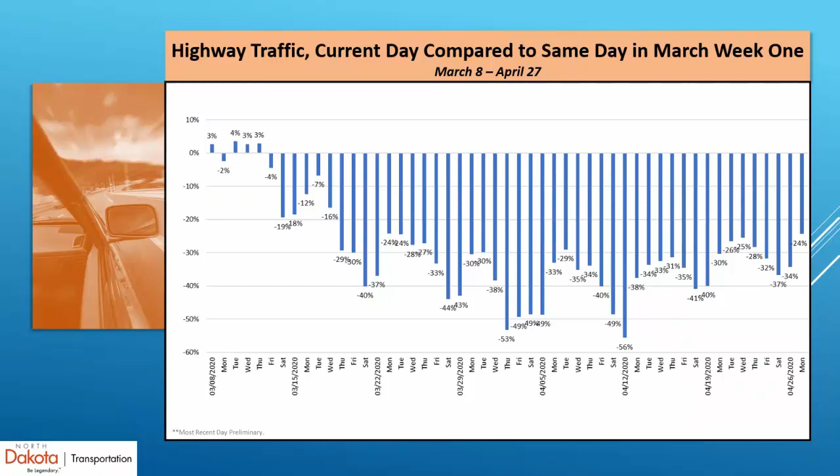We are talking about some gap funding coming from the federal government to assist DOTs around the country, including the North Dakota DOT, in dealing with the gap that's created from this kind of traffic volume reduction. So we thought it was an interesting chart, thought we'd share it with you and talk about its implications to the agency. It's very interesting.

I wanted to provide a bit of a safety message around COVID to the audience today, to our DOT employees, to our partners that are out there in the consulting community and contracting community, and also give you a message that we are going to continue with all of our projects scheduled for letting in 2020. We have, as I said earlier, quick started many of our projects. I'll talk about those in a bit.

And we wanted to share with you things to consider when you are working on DOT projects and with the NDDOT, and some of the similar things that we have considered here.

And as I had said earlier, our teams are mastering now ways to eliminate face-to-face meetings. So one of the things our teams are looking at with our projects are trying to do some of the project meetings online as opposed to face-to-face. Again, like the NDDOT, regular cleaning of common work areas and vehicles and field labs. Those are very important things to do to reduce the spread of the COVID virus.

And we have found that it's been very, not only helpful for mitigating the spread of the virus, but also I think people feeling good about the fact that they have to get in a vehicle that's been cleaned, that they know it's clean, or that they have to work in an area that they know it's been cleaned. I mean, that just gives a sense of confidence and helps them to engage in a normalized way. So it's really very helpful.

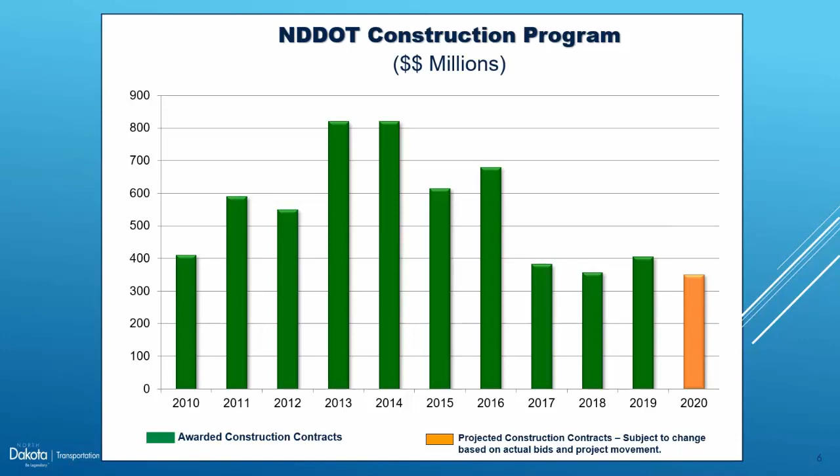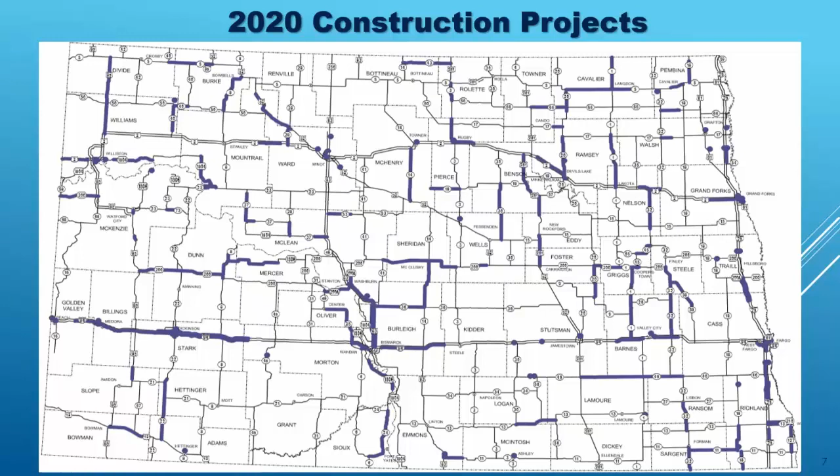And so this gives you a sense of all of the projects that we are going to be doing in 2020 throughout the state. And it's a really good representation geographically, really good representation from a safety point of view, from an asset preservation point of view. We're really quite pleased with all of the work that you all are doing for us, and our teams have been planning for a number of years. So I want to thank all of them for all the hard work that got us to this point in 2020.

I wanted to highlight a couple of projects. One is the completion of the Fargo Main Avenue project. We had started this last year, and it was a remarkably good project. So I thought it went great last year, and really remarkable sort of effort. And the second phase of that is happening now. I think they actually started this week.

The last segment of Highway 1804 near Williston is going on, and that is, let me see, I got a little note here. That is from the Red Mike area to County Road 42. And so we're really pleased that that's going on. And then, of course, the Long X Bridge replacement is happening now. I think we were delivering steel in the winter, and that's on Highway 85 south of Watford City.

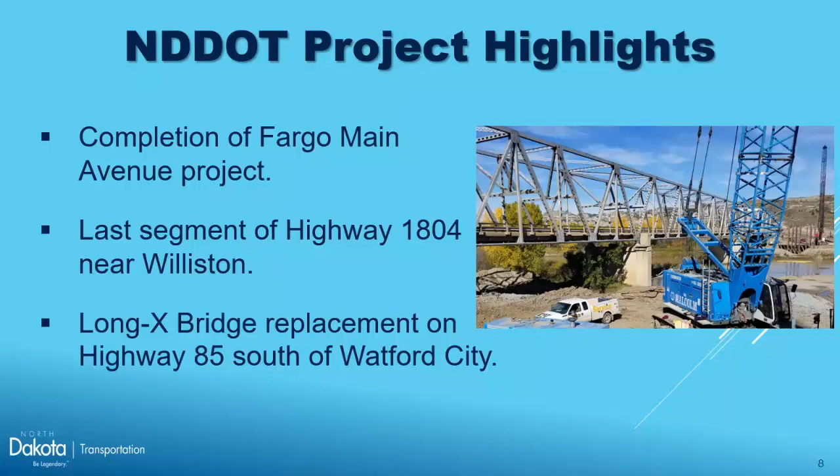I've also asked the staff to begin the 4-laning between Watford City and the Long X Bridge, and that's going to be coming up here in the next couple of years. Well, it's being worked on now. All the pre-construction work is being done now, and we'll see that as well.

But there's a number of projects here, something like, as I said, 160 to $200 million projects that we pushed up to begin now instead of a month or two from now. So active construction season in 2020, amazing effort last year as well.

And I think they were going to run a video. I'm going to look at, no, not yet. It's not going to run. Oh, it's not going to run? Okay. The link is on the live show. Okay. So there, I'm sorry, I've got somebody helping me.

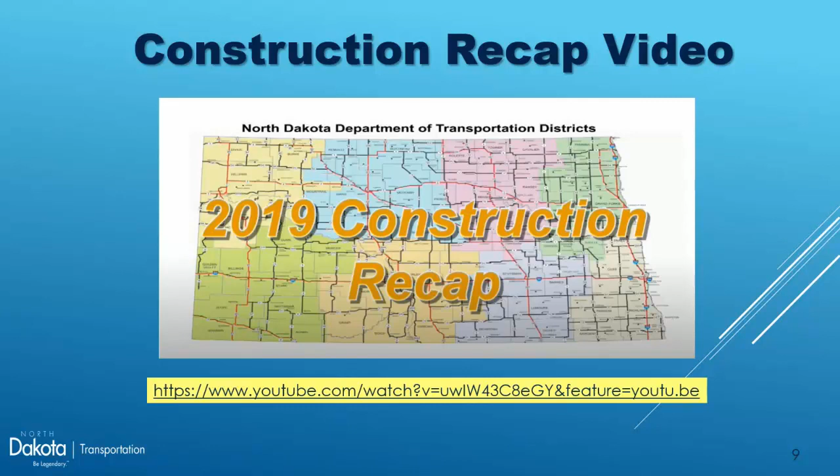We could take any questions now, but before we did that, I just wanted to express again my sincere gratitude to all of you for being here today, for being a part of the PDC conference. This unique format, I think, is something that we are learning as we go, and I think that it's something that we're going to be doing in the future. And we'd love to get your feedback about how to do this kind of presentation better, and how to do it in an optimal way as we go forward.

So we, as an organization that is deeply immersed in innovation, as an organization that is built around engineering and science, this kind of format is really interesting to us. And so we want to have you participate with us by helping us in terms of moving this kind of presentation format forward. But I also want to extend my gratitude just to you for all that you have done, not only in 19, but all that you are doing in 20.

And for our employees and our partner consultants, our partner engineering organizations, construction companies that are out there, and suppliers, thank you so much for what you do for North Dakota. And again, on behalf of Governor Burgum and Lieutenant Governor Sanford, the state legislature, thank you so much. We could not have the kind of great state that we have without a strong transportation system and a strong network of partners to be able to help us deliver that. So thank you so much.

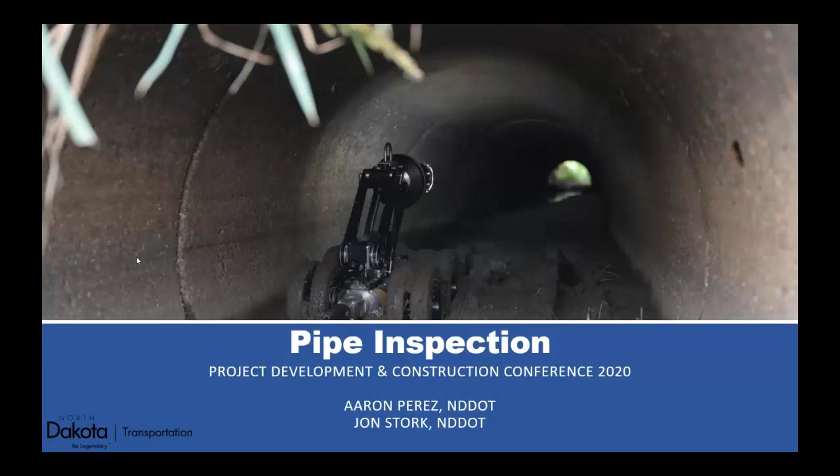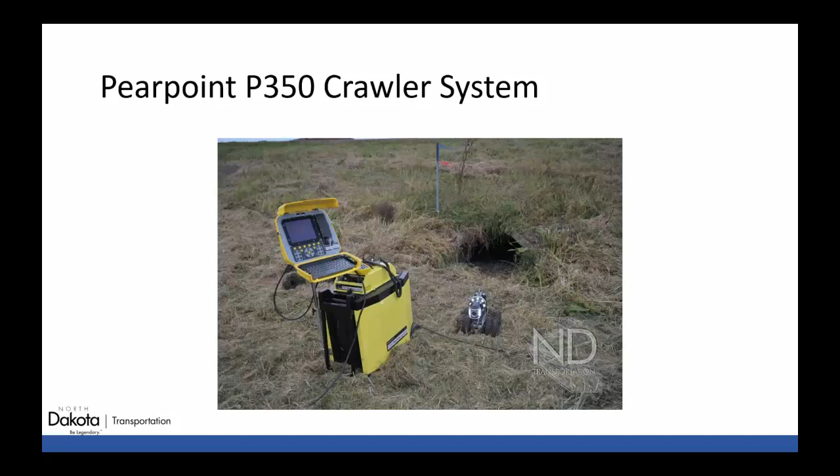Our first piece of equipment is the Pearpoint P350 crawler. This system is made up of the crawler itself, a powered drum, and a control module. To go over some of the crawler's capabilities, this system is completely waterproof. It is submersible up to 300 feet. The camera is pan, tilt, and zoom capable, and it runs off of electricity. We've primarily used a generator for collection, but there are other options with this.

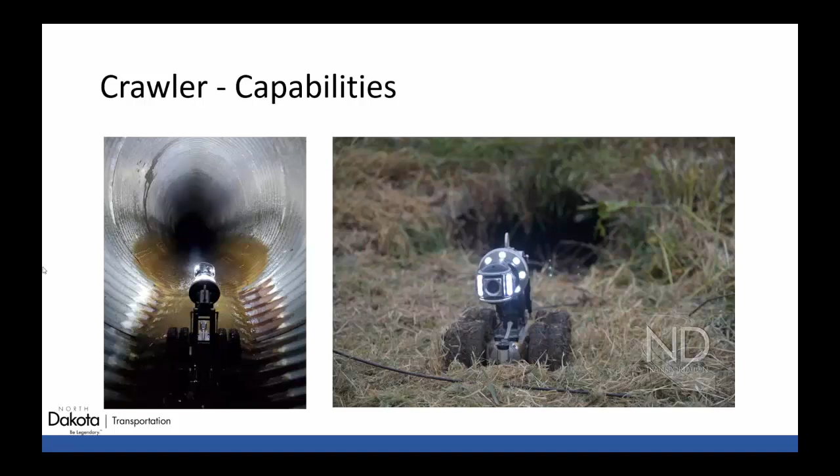Here are two pictures of the movement from the optional elevating arm. This arm allows the camera to be able to center itself in pipes up to 60 inches, depending on the overall configuration. And as you can see from these pictures, we are using double wide tire configurations for a total of 8 tires.

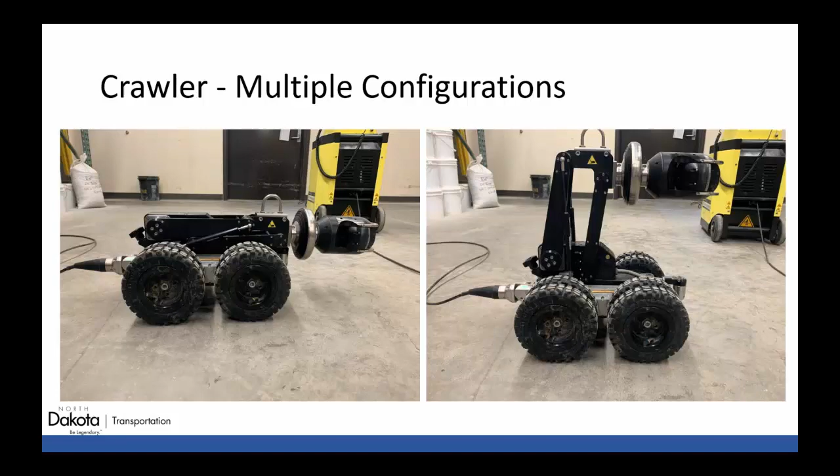And this crawler system really comes with multiple options for tires that can be used on a situational basis for our needs. This system also has a 4-tire cradle, which you can see on the picture in the middle and on the right, which gives the crawler the most height and uses the biggest tires that we have.

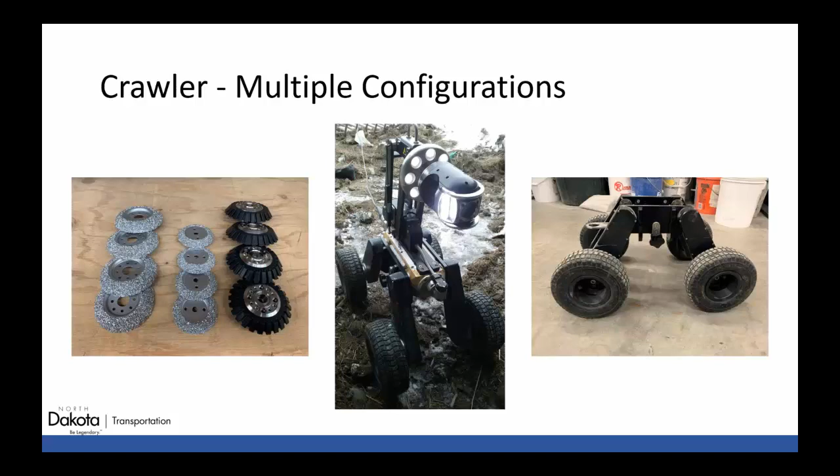So to talk about the command module and the powered drum, this crawler is really run by the command module. The powered drum has a total of 1,000 feet of cable in it, and all information travels through this cable from the camera to the command module. So it's really an all-wired system.

And the command module is where you control the crawler using the onboard screen to see what the camera sees, and there are also multiple ways to control the camera through this module. As you can see in the picture on the left, John is using the optional pendant to actually control the crawler while looking at the command module to see what the camera sees.

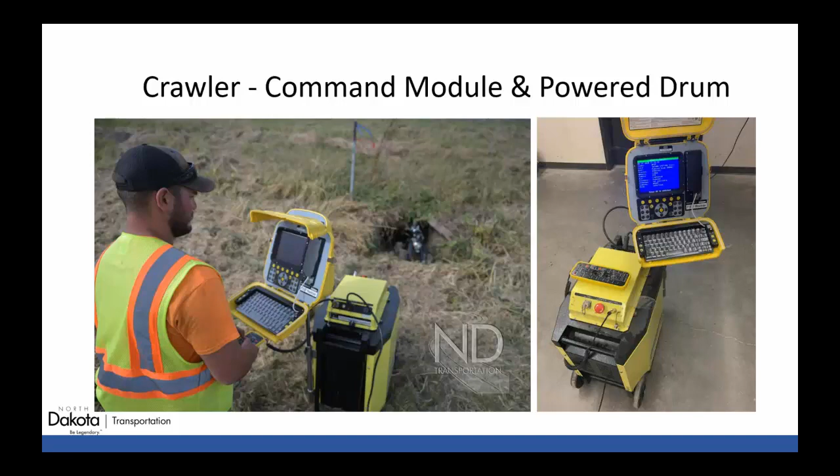So this is what you would see if you were controlling the crawler. Here's some of the on-screen details. So on the top is the distance counter, and this is actually done by measuring the length of cable that is out of the powered drum. So distance isn't measured by wheel movement, which is very helpful when the tires spin in mud and slick areas to keep that distance actually accurate.

Underneath that's the pitch angle, and the camera has a built-in inclinometer, which is used to display this pitch angle. And PurePoint calls the display towards the bottom of the screen the mimic controls, and here's where you can see the relative location of where the camera is, the horizontal orientation of the crawler, and your speed and steering thresholds, whether it's forward, backwards, left, or right.

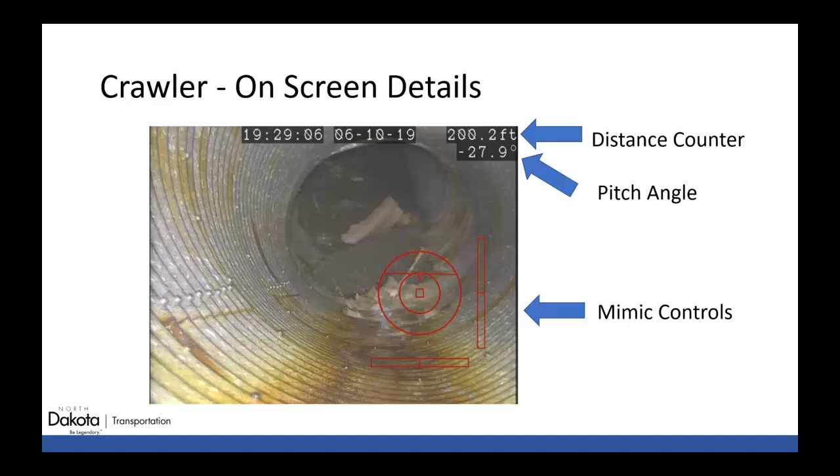So our second piece of inspection equipment that we have is our Hydraulic Inspection Vehicle Explorer, or HIVE for short. This is our more speedy option and more user-friendly option as well, and consists of a GoPro mounted to an RC car that can all be controlled using an iPad and a controller.

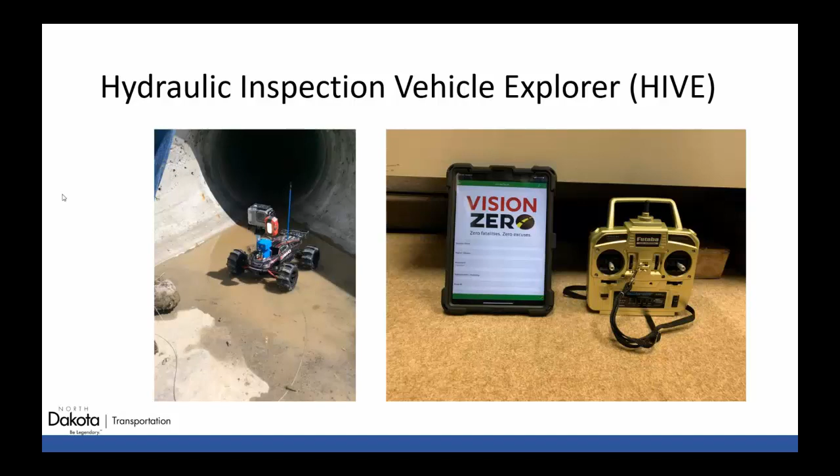We first found out about the HIVE unit from MnDOT. On their website, they have building instructions, parts lists, wiring schematics, anything you can need to assist in putting together the units, along with general information and research that's been done on it. Also, North Dakota LTAP has put together a HIVE, actually before we did. Dale Hageland with ND LTAP let us actually borrow their unit to assist us in putting together our first HIVE.

And Dale also gave us all their own parts lists, kept all their receipts and boxes to all the individual pieces, and this helped us out tremendously. So thank you, Dale. LTAP also has information on their website, including a user manual for their HIVE, if anyone is looking for additional resources.

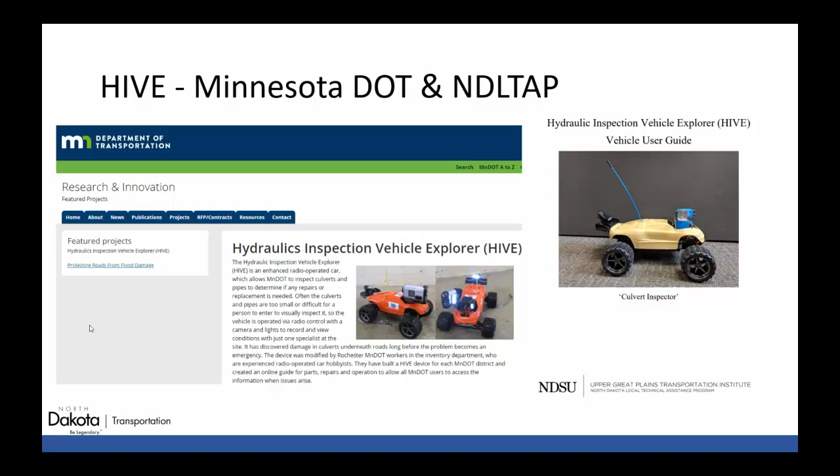We were invited by Mark Schrader with FHWA and Dale Hageland with ND LTAP to come and see how inspections were being conducted on pipes near Max, North Dakota in 2019 that were of importance to FHWA. And this was the first time we really got to see the HIVE in action. We actually used LTAP's HIVE for this inspection, and FHWA was using the Esri Collector app for their documentation and condition and location mapping for the pipes under these roads.

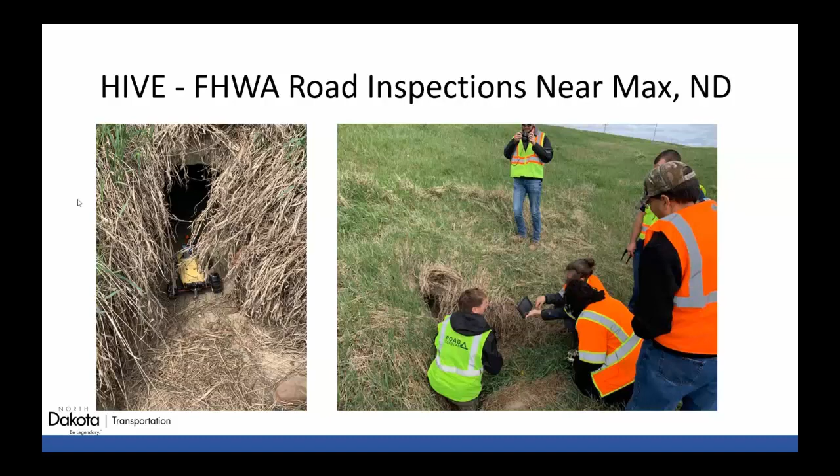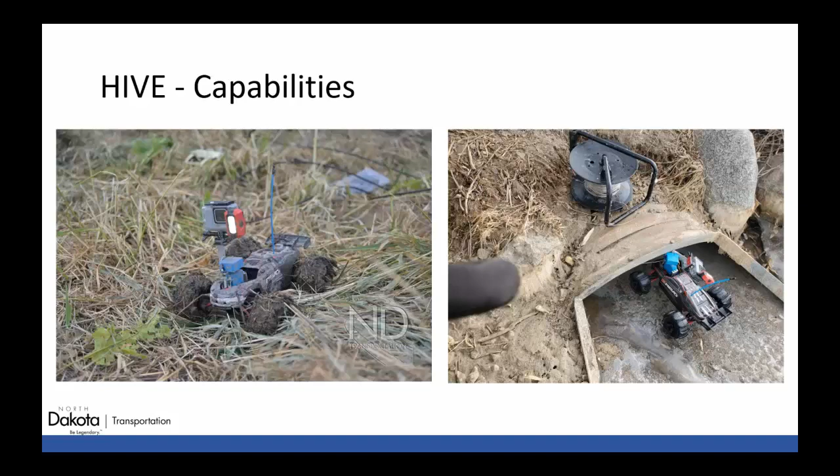So let's go over some of the capabilities of the HIVE. We found out this thing is very capable. We've had great success with this unit being able to run in actual really harsh pipe conditions. This thing's waterproof to about 4 inches of water, and we really consider this thing a little monster when it comes to these inspections. It's a pretty cool piece of equipment.

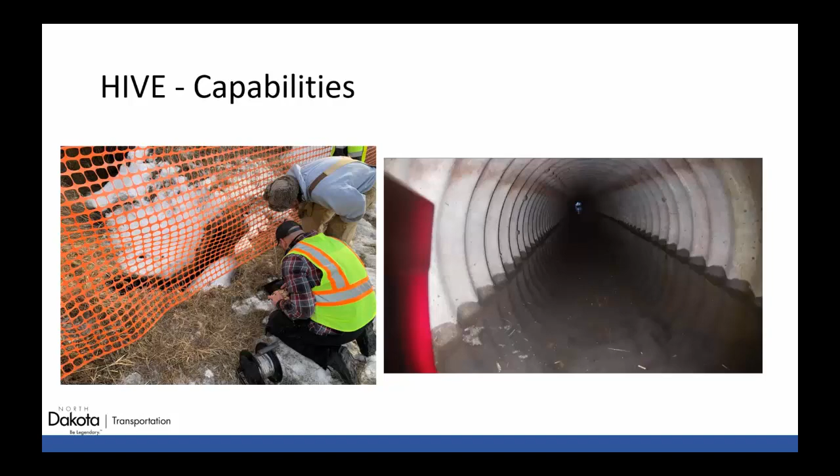So now I'll get into some of the different inspections we have done that are more focused on the crawler. The first is a pipe along the west ditch of I-29 northbound through Grand Forks on exit 141, and it's right next to a railroad bridge. This pipe is about 140 feet long and ran parallel with the interstate. This pipe was disturbed due to a landslide, and we were asked to go inspect it by our NDDOT geotechnical section.

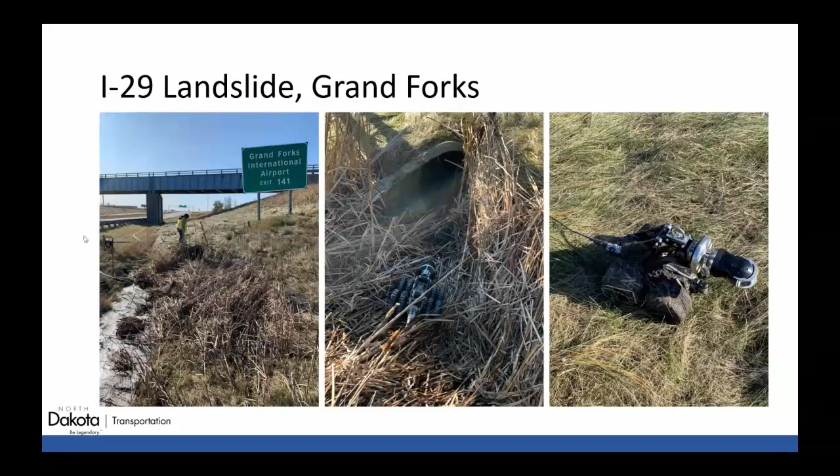So as you can see, this landslide really messed up the alignment of this pipe. The embankment near the railroad bridge crossing displaced the end section by about 2 feet. And we actually had some serious issues with our equipment traversing this pipe due to the severe separation between the barrels, as you can see.

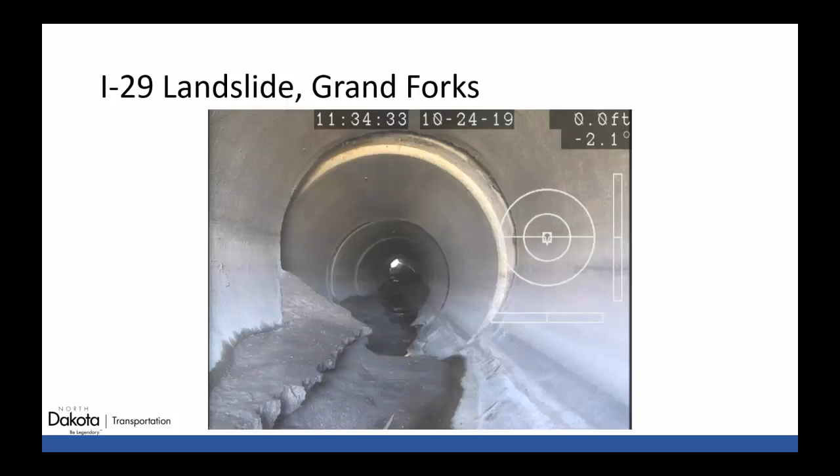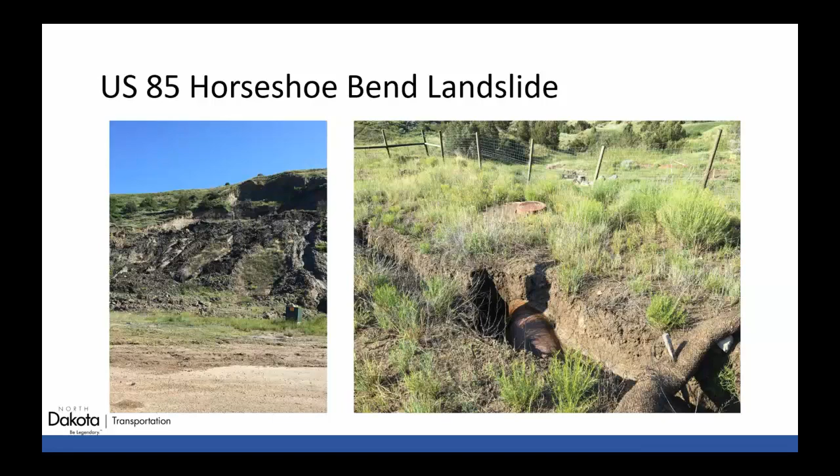So we deployed from the inlets of each pipe and really tried to find the best way to set up and maneuver through the landslide material that was very slippery Badlands clay, as you can see from some of the material in these pictures around the pipe inlets and where we set up.

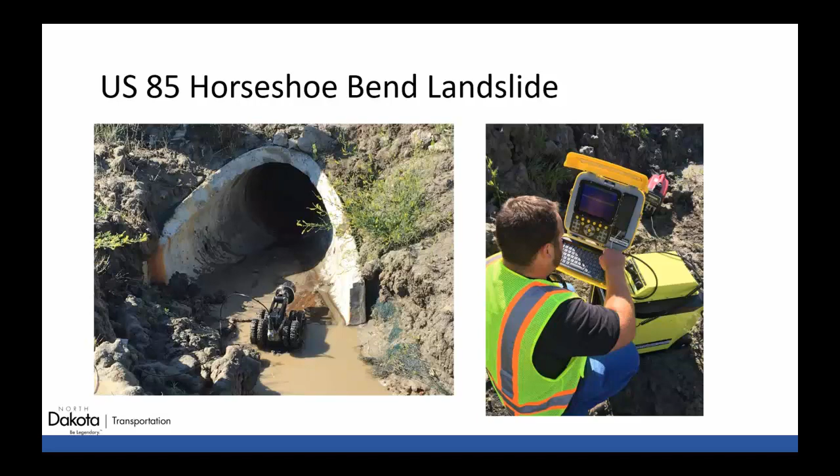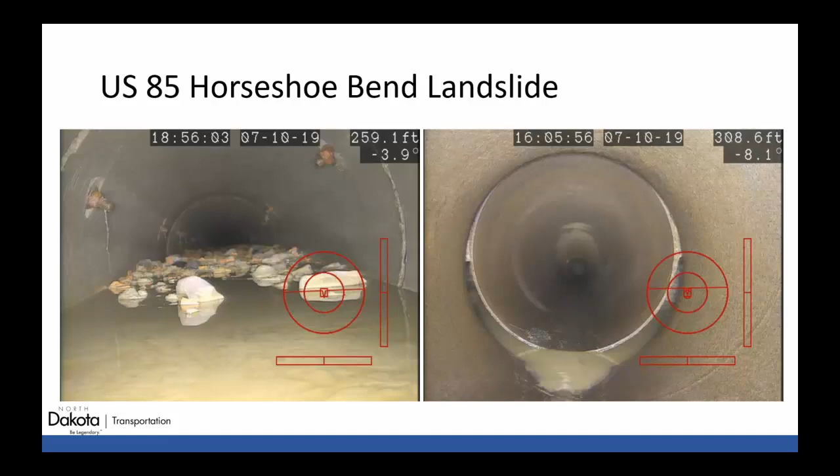So our next inspection happened in Bismarck near Grant Marsh Bridge. The inlet of this pipe was located in the south ditch of I-94. It traveled downhill a 2-to-1 slope to River Road, where it then flattened out under River Road and exited directly into the Missouri River. We were asked by Bismarck District to inspect this, as they knew there was already an issue in this pipe, as the ground close to River Road had started to wash away around the pipe. So they just wanted to see how bad the issue was and how much of the pipe actually needed to be replaced or fixed.

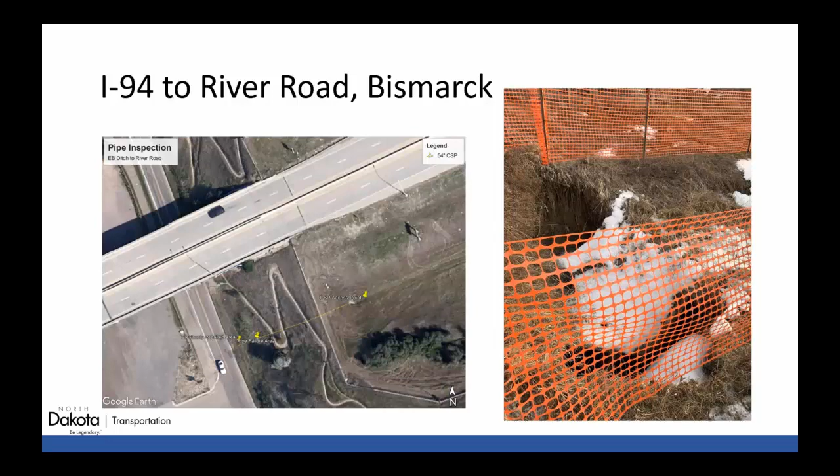So we deployed in the south ditch of I-94 in the inlet of the pipe. The outlet at the time was pretty well submerged by water and also partially frozen, which restricted us. And the district came out and removed the large inlet grate in order for us to actually conduct our inspection.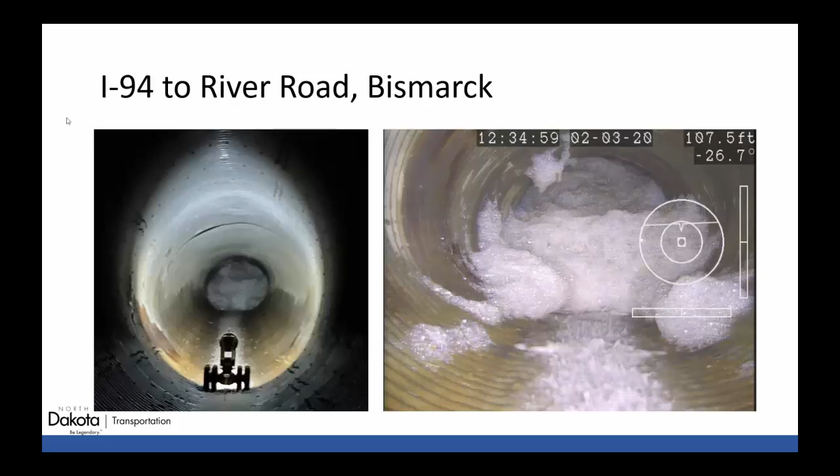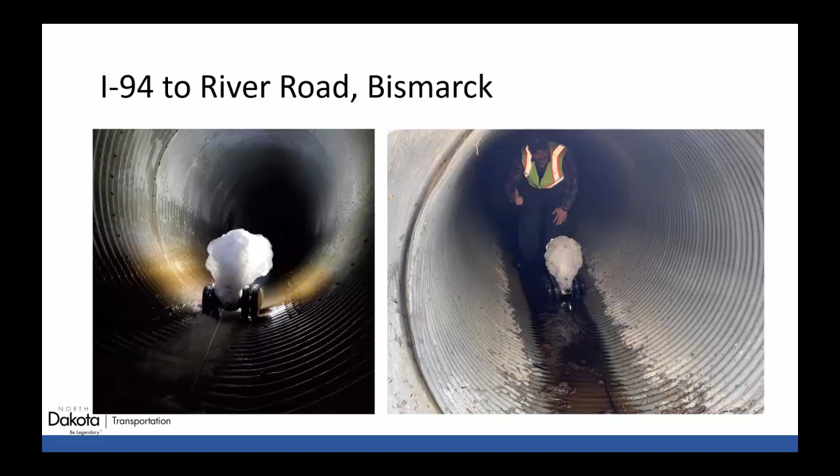We put our crawler through the foam to see if we could see anything and maybe see if it ended. Instead, we found out it did not end and completely engulfed our crawler, including the camera, and didn't allow our camera to see anything. And we pulled the crawler out. This is how it looked, just like a little cloud on wheels.

So we waited a few days and went back out to inspect this pipe once the foam had subsided. And as you can see from the picture, the water traveling down this 2-to-1 right before the pipe flattened out was actually exiting through a hole in the invert of this pipe, flowing around the pipe, causing the washout issue that the district saw. And here I will show a short video of what this actually looked like from the crawler.

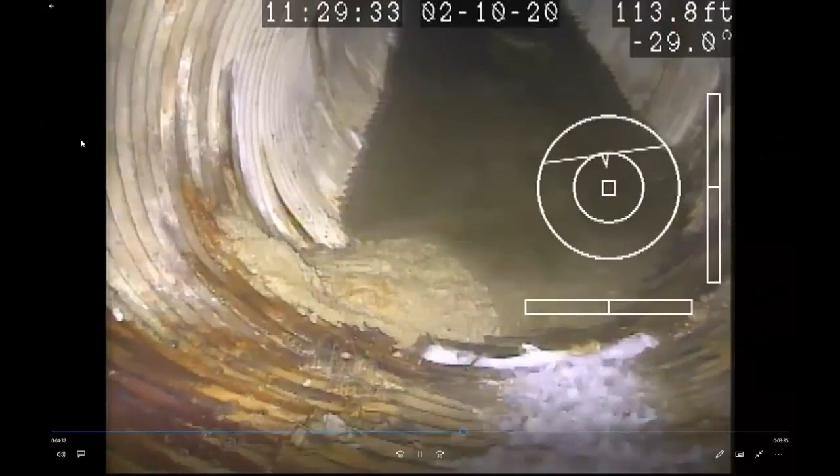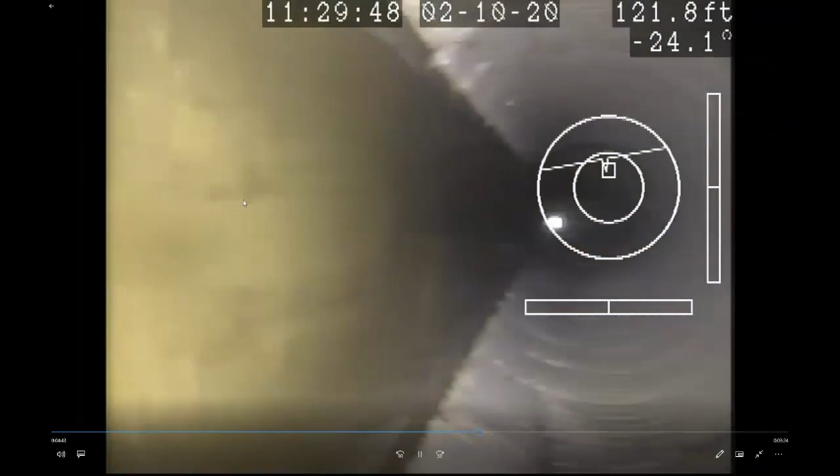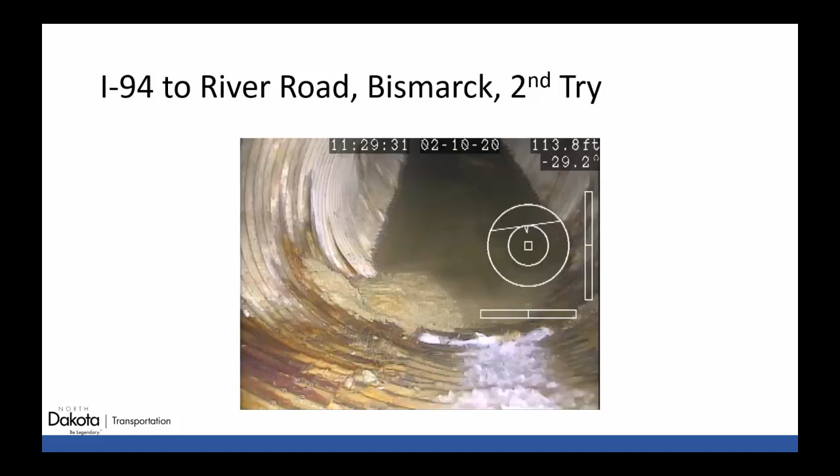So now I'll turn it over to John and let him go over the Hive unit more in depth, as well as the collection software and where all these inspections and inventorying will lead to.

So a little bit more background on these inspections. The inspections that Aaron was talking about are more of an emergency pipe inspection where typically your failure has already occurred, whether it was from a natural event such as a landslide or a storm event, or just a failure from age or deterioration. And then our goal is to assess the extent of the damage and basically provide an in-depth look and aid the designers in figuring out the best course of repair in these situations.

So these are typically the most extreme environments we encounter. We usually bring both units, and sometimes we deploy the more robust pier point if the situation calls for it. Sometimes, like Aaron said, we use the smaller unit depending on the situation.

So on the other hand, these corridor assessments are typically more of an asset management type routine inspection. These are meant to assess the in-place pipes for replacement on upcoming projects, or simply establish a baseline rating to use for deterioration monitoring and planning purposes for the future. So these assessments, typically we've been doing 10 to 20 mile stretches, and what we found so far, most of them are functional pipes in fair condition.

So these assessments are a great tool for finding pipes that we need to replace, but not only that, they're great for finding which pipes we don't need to replace. So to do these assessments, we asked for some district input on upcoming projects or problem stretches of roadway where we could test our equipment and involve district personnel for training opportunities.

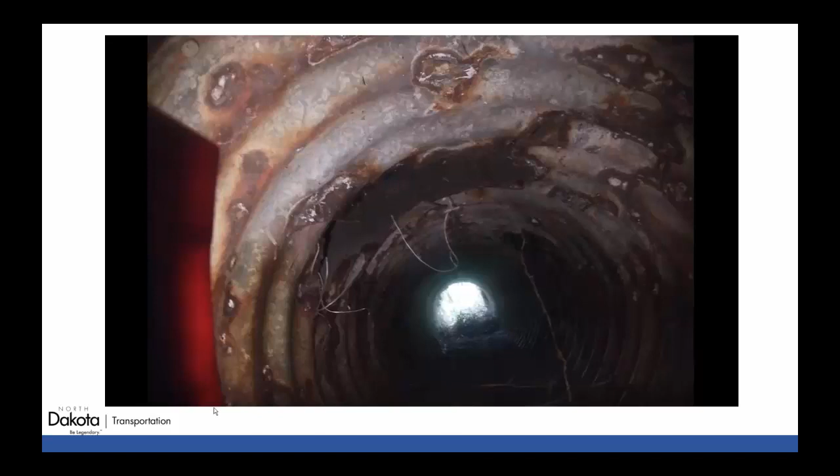This is a good example of a construction installation problem. This is probably from unloading the pipe or from actually installing the pipe. You can see a tear.

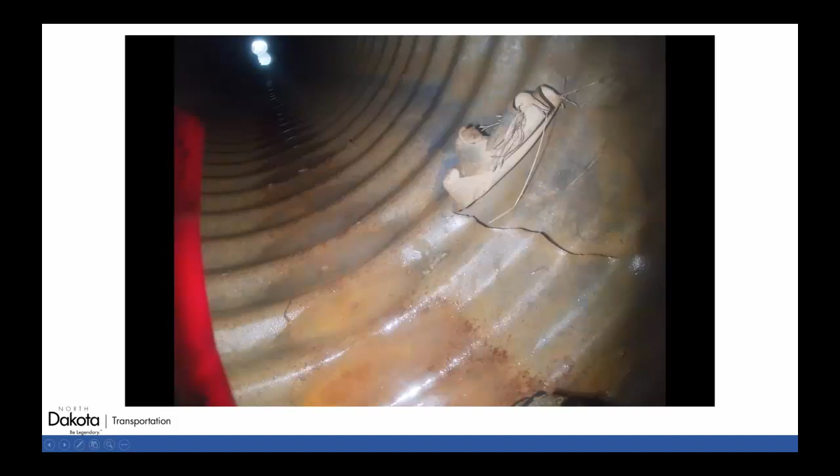Another neat thing to note was actually a few weeks after we did our initial training with Dickinson District, they actually utilized the Hive on a full depth reclamation job up near Halliday, North Dakota on Highway 8. So this was encouraging to us just to see the adoption of the new technology so soon after the initial training. In this pipe, you can see some separation of the barrels here, some standing water, slight misalignment. You can see a little bit of cracking here at about 4 o'clock on the haunches.

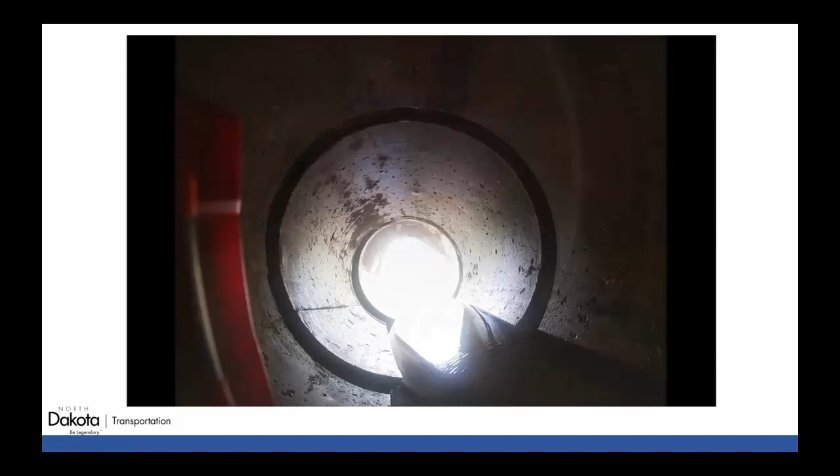This is another pipe up near Halliday. You can see the end section has separated and caused some void, infiltrating soil into the pipe itself. You can see some pretty severe misalignment here. This is a pretty common area where they have some shifting of pipes and some landslides on this stretch. So it was a good tool to get some in-depth look at what was actually going on there.

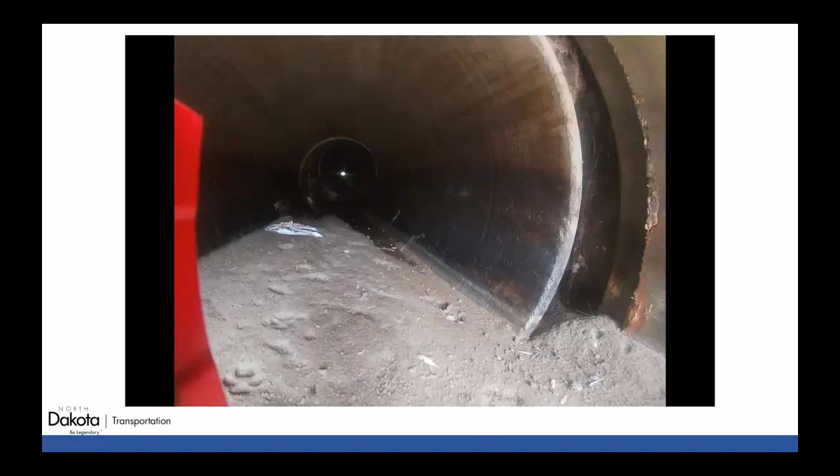This one actually was a few months later. We spent a few days and a few nights down in Valley City District, down near Ashley on Highway 11. As many of you know, they had a very wet spring, summer, and I guess even fall when we were down there back in 2019. This made some interesting environments for us to run our equipment through, but it also let us test our equipment in some less than ideal situations.

So here you can see this is the end section. You have some pretty significant cracking at the crown. You also have some spalling at the joint. The barrel on this one actually looked pretty good, so this would be a good candidate for just an end section replacement.

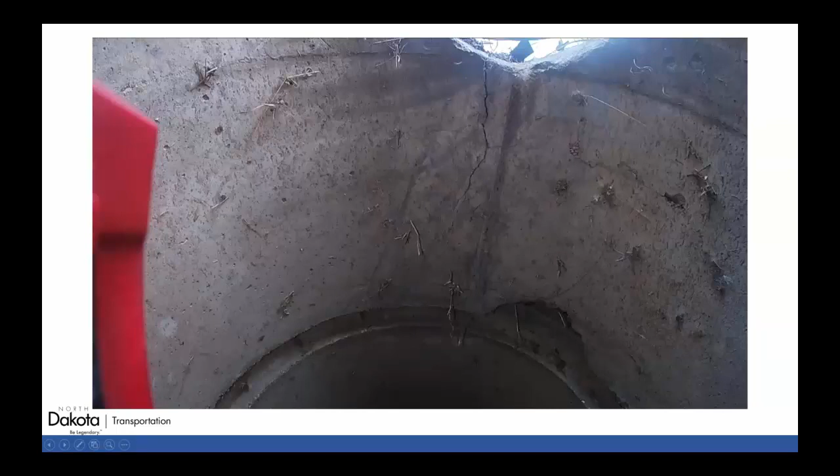On this one, you can see, there's a lot of wetlands down in that area of the state. So there's a lot of equalizer pipes, and with high flows comes high sediment, and the water recedes, leaves a bunch of sediment. So here they had about a 50% full pipe of sedimentation. The barrel actually looked pretty good, but this would be a good candidate to mark for cleaning.

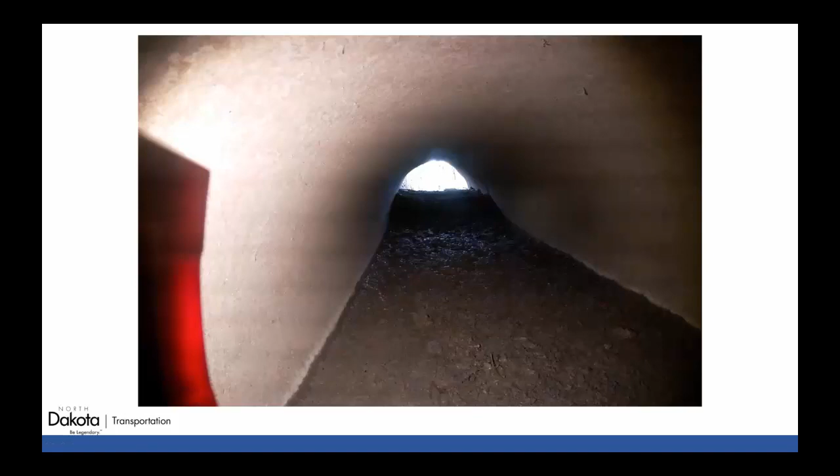So this is the typical kind of pipe environment that you'll see in some of these areas. Being as they aren't tied pipes, you have a little bit of shifting. So you can see at each one of these joints, you have infiltration of soil at each joint, and then you also have pretty muddy conditions.

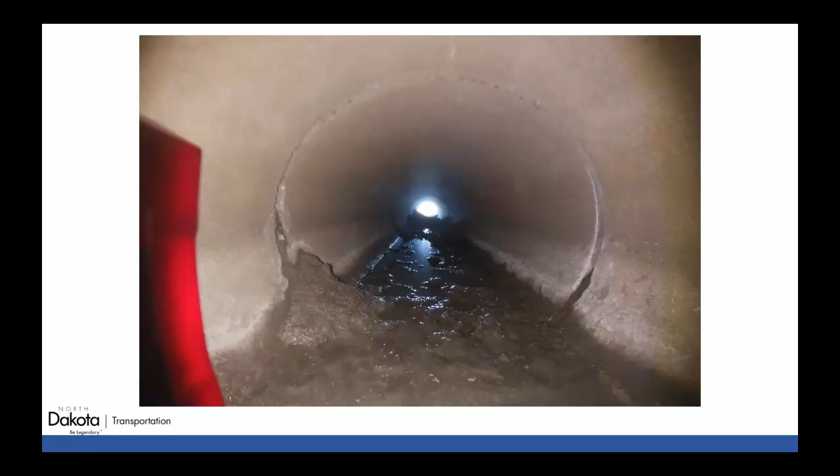So the problem with pipes like this, when you get these separations, is you have all of this soil coming in and creating a void up top of the pipe, and then you lose your soil support for your flexible pavement up top, and it can't span it, and pretty soon it fails and you have a giant pothole in the road.

Valley City has experienced some of these issues on this stretch of roadway, and they were actually pretty hopeful and excited about going and investigating some of the other issues that they've had with other pipes when we left this equipment with them.

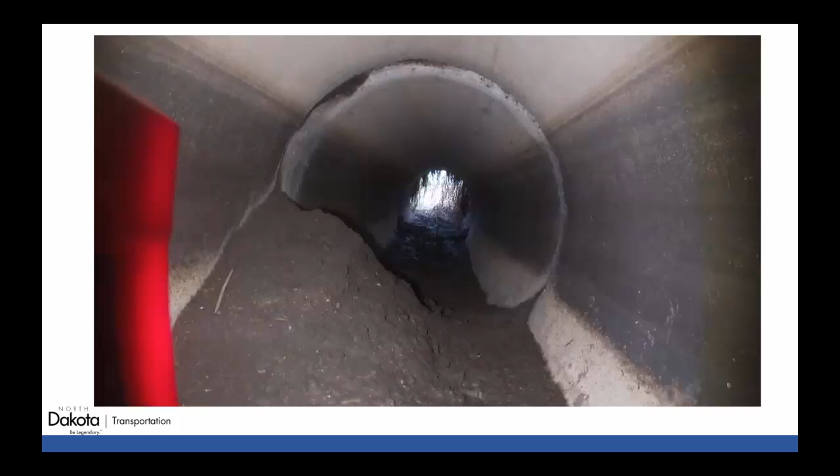This is also the first project where we introduced the Survey123 data collection app. We received some great feedback from the Valley City maintenance staff about the ease of collection and some of the pros of using the digital storage. We collected about 70 pipes here, and you're looking at 5 to 10 photos and a video for each one. So you're talking quite a bit of media. So this really helps to keep things straight and collected efficiently.

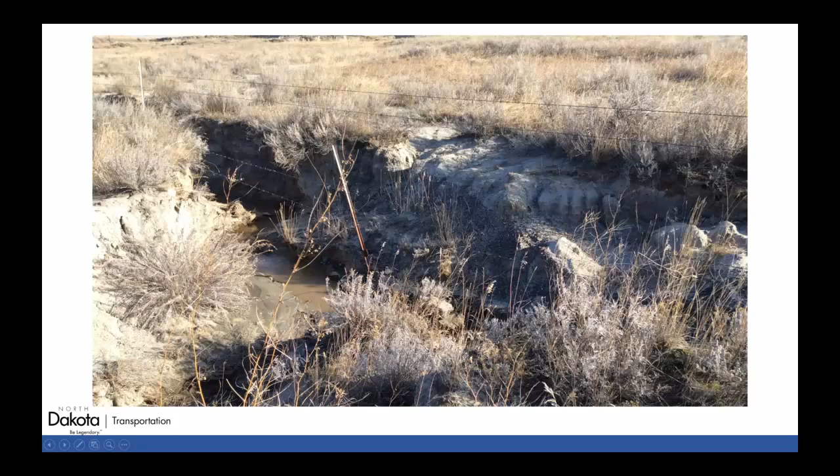So we actually had a section on the other side here where you had some washouts under the asphalt that it was bridging. So we ended up conveying these results to the Bismarck district back in November, and then that prompted them to do a full centerline pipe inventory on this project for an upcoming sliver widening.

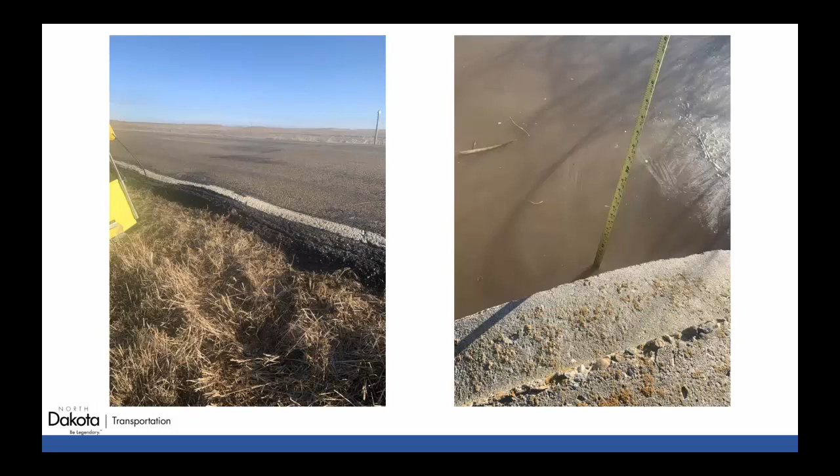So fast forward a few months, this is that same stretch of roadway. We went out and spent a few days with the district staff there. And obviously you can tell it's winter. So that posed some interesting challenges. Anytime you're talking about cold weather and gloves and touchscreens and batteries and electronics, it creates some issues. But overall, it went pretty well. It just added a little bit to the collection time.

Obviously, digging out pipes when you're talking about a few feet of snow takes a little bit of time, or even finding pipes if they didn't have the markers was next to impossible, even if you knew the location of the pipe. Also, the reduced traction in the pipe was kind of an unforeseen circumstance. It's difficult to drive an RC car uphill on ice, so you kind of had to deploy from the upstream end.

And then once the weather started warming up, all of this water then had to evacuate through the pipes. And so that put a bit of a delay on us as well. Some pros of the winter collection: obviously it's downtime, so you have more available staffing. Certain pipes that don't ever drain, you can get into them and take a look at the invert while they're frozen over.

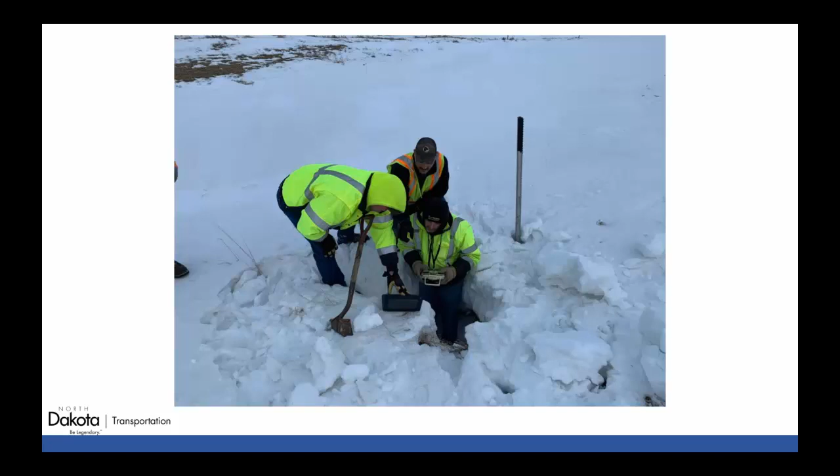So you visited all these pipes, now you have all of these photos and videos. What do you do with all of it? You can't just expect people to sift through tens of thousands or hundreds of thousands of photos to actually find out the information that they want.

So as Aaron said, we demoed the Esri Collector app with FHWA, and we looked at a couple other software packages. Ultimately, we chose Survey 123 because it fit our needs. It's fairly easy for field collection, and we'll get into that in a bit, and it's highly customizable for the form. One of the big pros of this is its offline operation. A lot of these areas you don't actually have cell signal or internet access, so you can actually collect offline. Once you get back online, it will send all of those forms off and upload them to the server for you.

So this is actually the Survey 123 data collection app. This is what the inspector would see on their iPad. This is the kind of information that you'll be collecting. Your top is just your general initials, the district the pipe is in, highway number. You have a few pipe specific details such as concrete, plastic, size, orientation, all of that. Your inspection date autofills when you open the form itself. The video collected, that's simply to filter if you have media associated with the pipe itself.

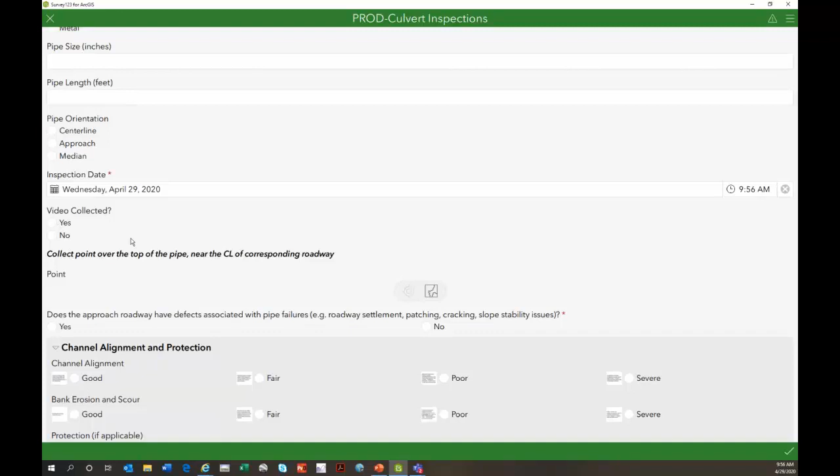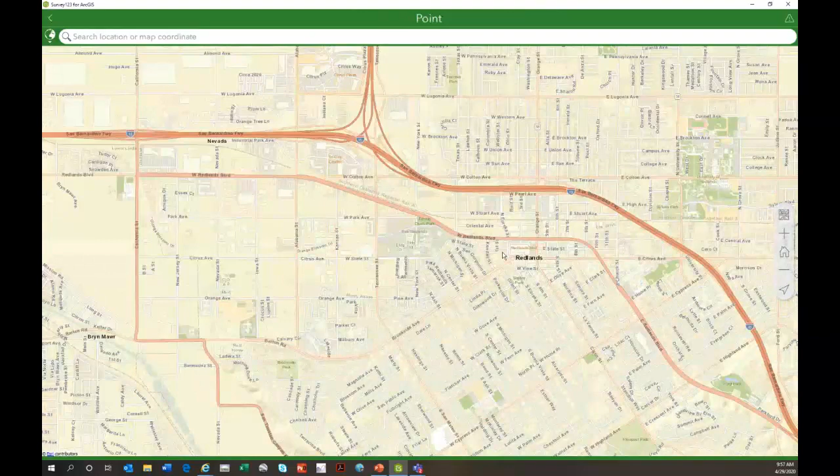The collect point, so this is actually a geodata location where if I had GPS capability on my computer itself, it would place me at my location. Because I don't, it's telling me I'm there. Now this can be used for actually assigning you to an RP along a route. So that's a pretty powerful tool.

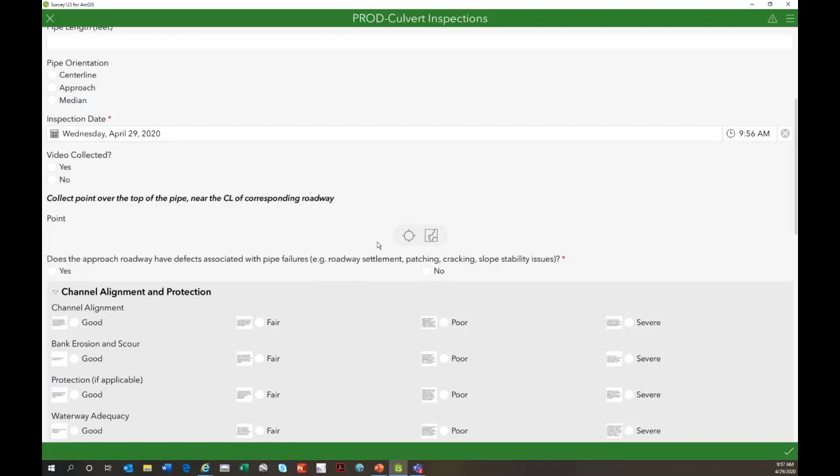And then you get into the ranking system. So this is your approach roadway. So like the one on Highway 6 where you have the rutting, you would click yes, and then it'll bring up a series of questions about different distresses along the roadway. And then you assign ratings to that. It automatically prompts you to bring up a camera. If the camera wasn't being used by Microsoft Teams, it would automatically bring it up, and then you simply attach a photo to it and it automatically attaches. You can add comments to that photo, all of this stuff.

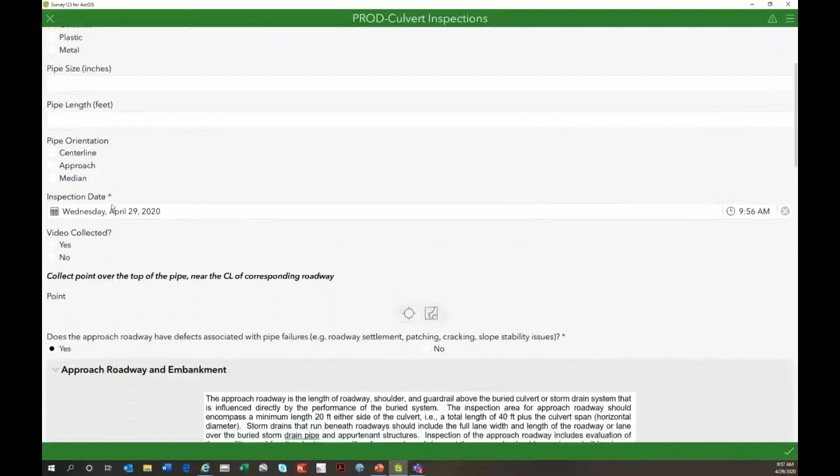It's also worth noting that all of these are conditional statements. So if you click concrete, you'll have different ratings than if you click plastic or steel. And then steel, you have different choices of what type of steel pipe it is. So then you go through all of these conditional ratings. Each one of these actually has a little cheat sheet to it. These are all rankings that were derived off the update to the 1986 FHWA culvert inspection manual. So I did not just make these up, but they're basically meant to be a reference guide so that we have a standardized inspection and all of our inspectors are on the same page of what good, fair, poor, severe actually mean for each of these respective ratings.

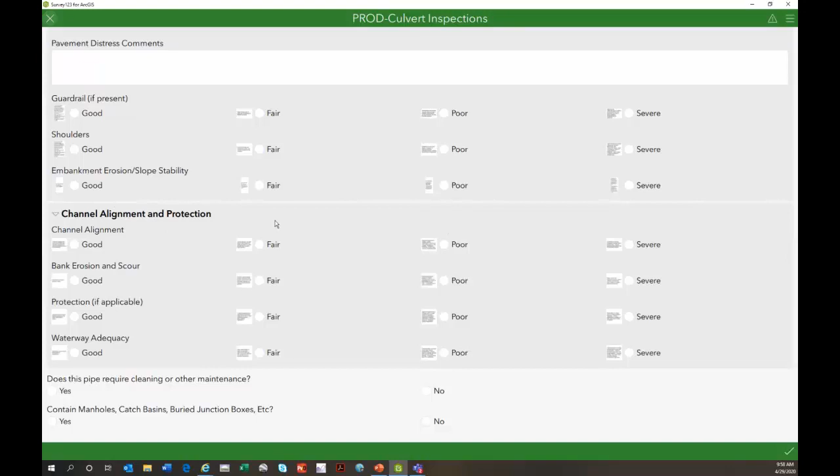So you keep going through all of these. Some of the things at the bottom, pipe require maintenance, we'll get into that a little bit later. That's basically a filtering tool so that we can track that. Some of these, if you click yes, they bring up more. Most of the time you're not going to have manholes, catch basins, or junction boxes within your pipes, so it'll keep it collapsed just to keep the form a little bit cleaner.

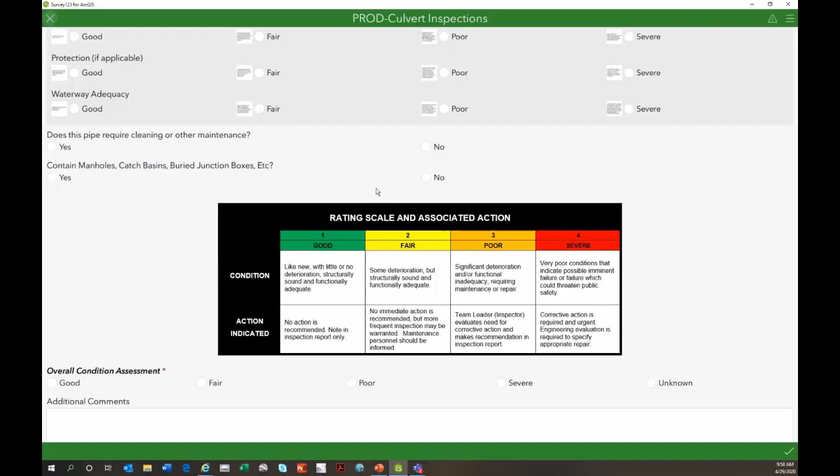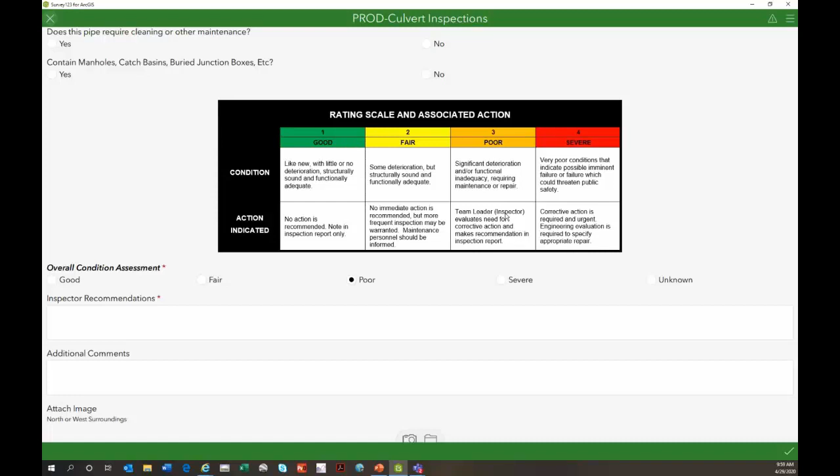Once you're done with the actual inspection itself, you assign an overall condition rating based off of your scale here and the ratings above it. Depending on what you pick, sometimes it'll have you do recommendations, if you pick poor or severe. If you can't find the pipe, let's say it's submerged, you click unknown, and that'll also be a filterable thing later. And then you have your associated actions depending on your rating scale. So you can enter those, you can enter your additional comments, you can enter photos, like I said before.

You click the camera icon, it brings your photo up, you take your picture, it automatically attaches. There's no backlogging on that. And then it also tags what your photo is. So you're looking at a photo, it'll be tagged north or west surroundings. It's great for knowing what you're actually looking at. You don't have to type a comment if it's attached in that field. And then you sign, you can put your link to your video here, and then you click submit.

Once you click submit, it uploads to our server. It actually uploads to Esri server, and then we pull from Esri server. Esri also has a viewer, but theirs requires a license. So we set up our own viewer so that all of our staff can utilize this without needing an Esri license.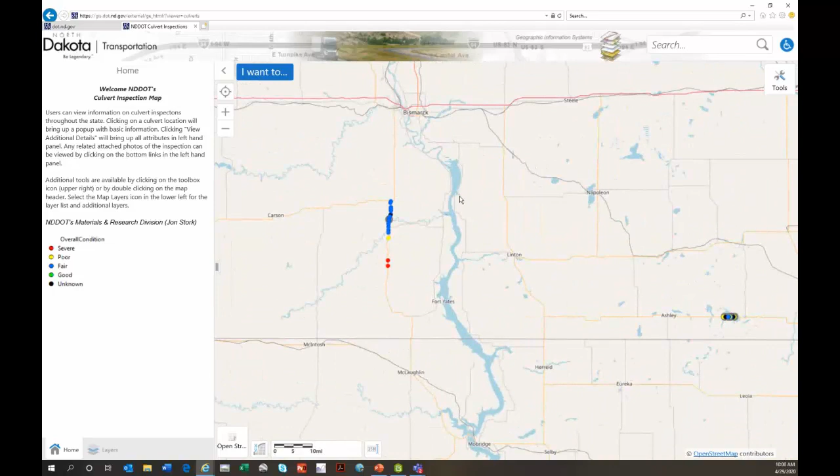This is actually what you'll see. These are all pipes collected. These are the ones on North Dakota 6 that I was talking about before. So then you can click into the details of it. You see your general details. You see your overall condition, diameter, length, all of that stuff.

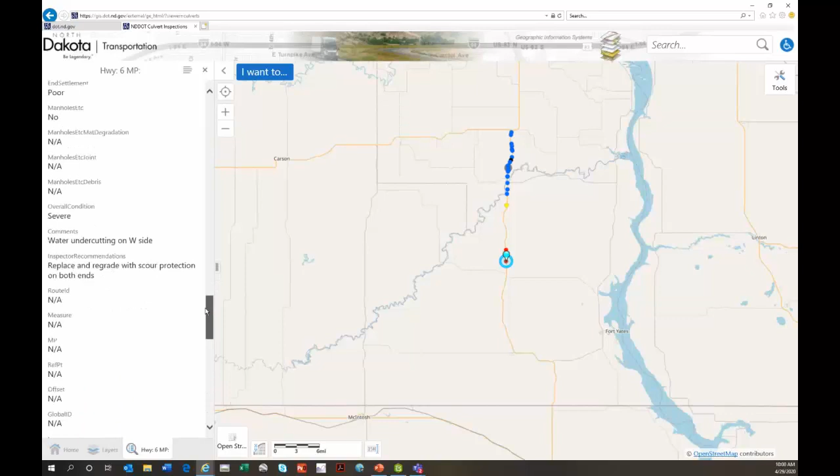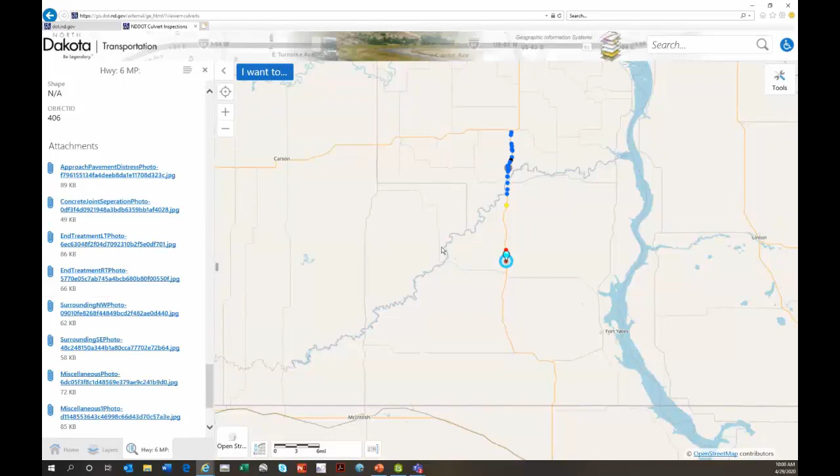You can click your additional details and you see all of the defects that were associated on that form. You can see all of your comments, all of your photos are attached at the bottom. So if you want to see, okay, I want to take a look at the approach pavement distress photo. You click that, it brings up your distresses at that location. So it's a really powerful tool of just keeping all of your stuff straight and keeping it organized.

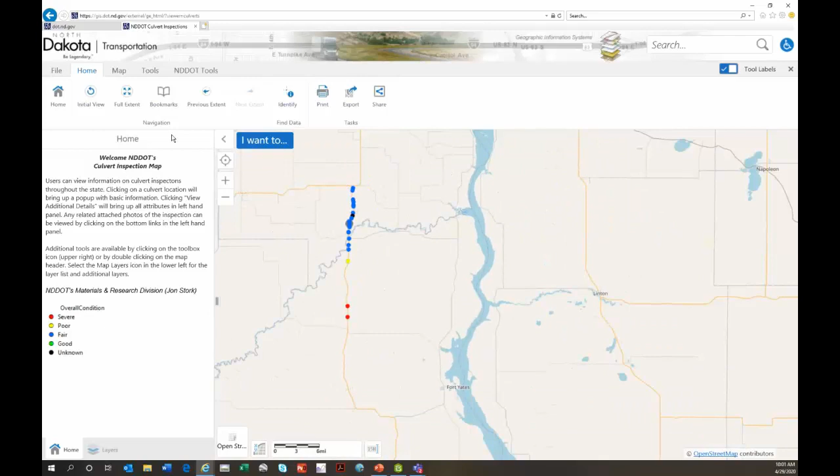Another thing you can do with this is actually the filtering and the query tool. There's basically limitless options of what you can do with this. But if you go to tools and you go to query, you can actually sort by different areas, different districts if you made a polygon for it, and then you can filter by all of these distresses.

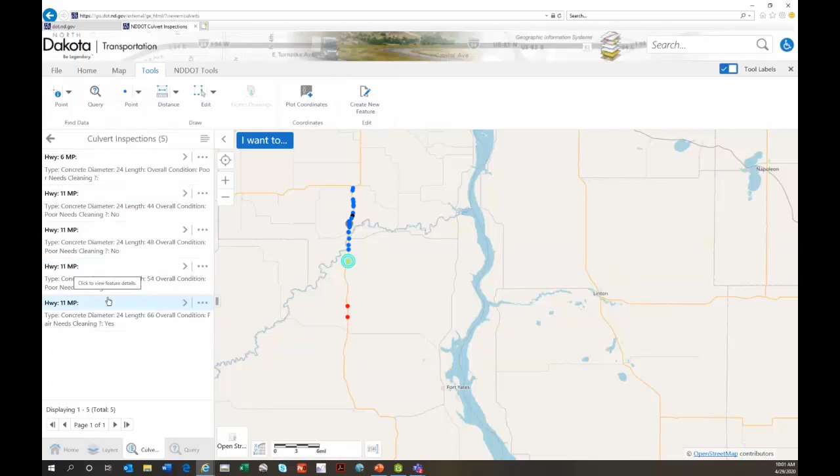So let's say you wanted to see concrete cracking, all of the pipes within the map area that have a poor rating on cracking. So then you go ahead and you click that and you have all of these 5, and then you can export this however you want to, do whatever you want in Excel. I mean, it's a pretty powerful tool for data

observation and utilization there. So the gray ring around here, this is what we were talking about as the needs cleaning. So that's a pretty powerful tool. We'll talk a little bit later, but you could export all of your cleaning locations and all of their coordinates even to a report and then hand them off to whoever's doing the work. So that is our viewer.

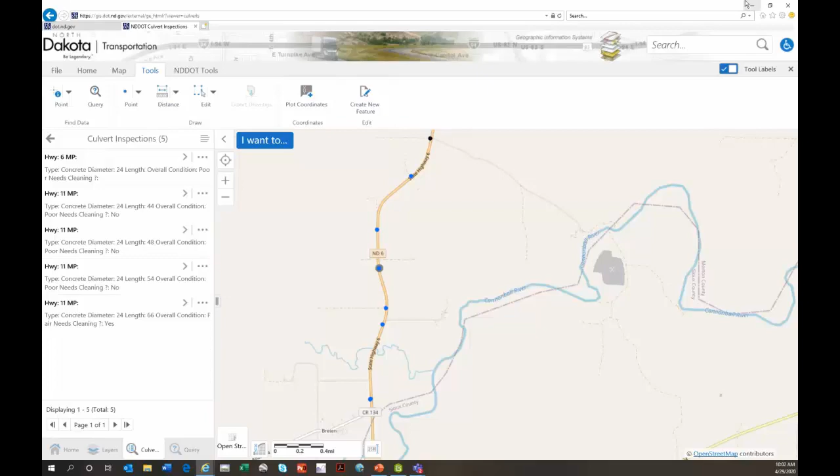So why are we doing all of this? Well, obviously our number one goal here is safety. So the goal of this program was to perform these inspections proactively instead of always reactively, to basically get in front of these deteriorations before they become a problem for the traveling public. That's the number one priority.

Now, a lot of these go hand in hand. Your cost savings, obviously there's a lot of man hours to actually inventory these pipes. But we also save a lot of money in a lot of other ways that are hard to quantify. So take the River Road example that Aaron was talking about. The pipe was basically a heavy flow 2-to-1 on one side, and then it outletted in the river.

So there's basically no way to access by either end to take a look at what was actually causing that sinkhole. So the first day, yeah, we couldn't access it. The second day, it took us probably a few hours with the design staff out there to go ahead and take a look at what was causing that defect, and if nothing else, just to give them a location to start digging. Otherwise, you would have to sort of do an exploratory excavation.

You'd have to shut down River Road, do some of that stuff. There's a lot more cost and there's a lot more invasiveness to stuff like that. You can also take a look at alternative fixes such as liners. You can see, okay, is this pipe still structurally sound? Can we rehab it instead of always replacing it? You can get a nice look inside of the pipe. You have less downtime, less delay to the public, things like that.

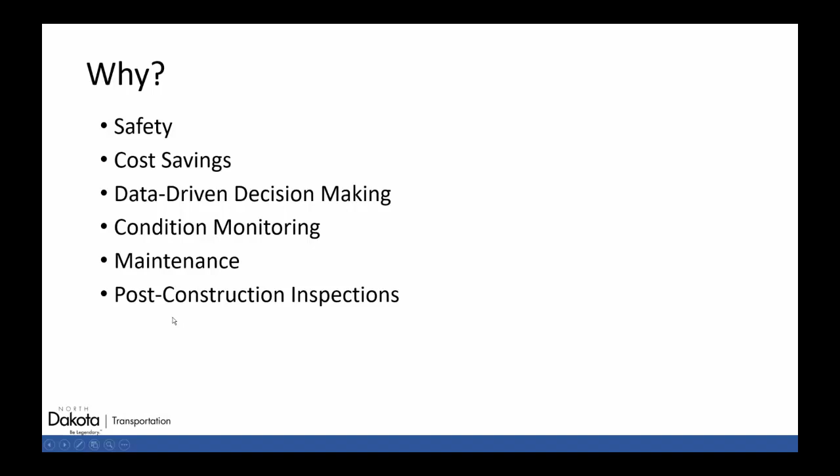The maintenance side, we kind of touched on this a little bit. It's the ability to verify in-field which pipes need cleaning or maintenance or end sections, and then being able to export the locations to whoever's doing the work, whether it's in-house staff or contracted. Post-construction inspections, that's basically just another QC tool to ensure that we get quality construction and the ability to monitor during a potential warranty period for defects in installation or the workmanship.

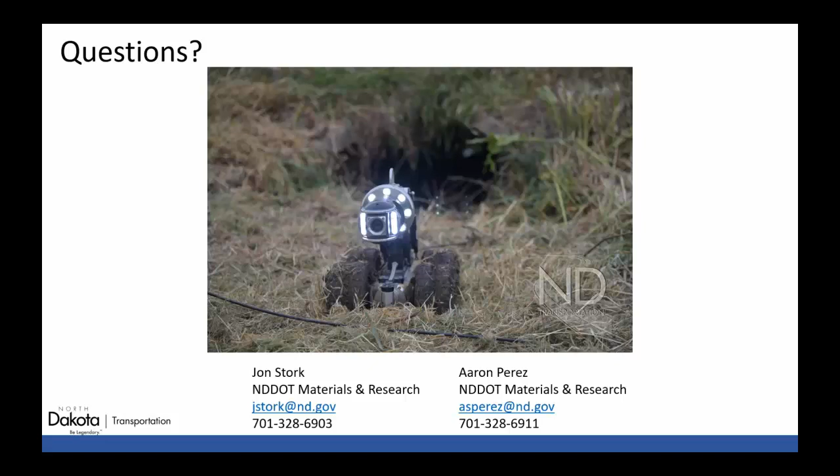So for any of you district personnel in here, if you would like to get involved with this, or if you have a stretch of road that you think would be a good candidate for this, let myself or Aaron know, and we will try to make that happen. So that's all I have for pipe inspections. I think we'll take a question or two. Matt?

Yeah, I got several questions that have come in, so send the first couple to you, Jon. What happens if one of those pipe units gets stuck? Sure. So the big unit is tethered by the data cable itself with 1,000 feet of spool. All of our smaller ones run stainless steel, 250-foot reels. So if your batteries die, if you get it stuck, you flip it, which happens quite frequently, you just reel it back, and you don't lose the equipment.

There have been times where we've lost a light or something in there, and a lot of times you can get them out with a little bit of ingenuity, but it depends. If it's a long pipe, that's just how it goes.

The other question, and I think maybe Aaron answered this in the chat here, but have you experienced any critters or skunks when you're running the camera through the pipes? Skunks, no, not yet, thankfully. A lot of skunk poop, and a lot of skunk scent. Especially during the winter, it's a nice cozy little hole for them, and it stinks like skunk. You're very hesitant to jump in there. But we found a lot of mice, a lot of frogs, stuff like that, but not yet. I'm sure we will.